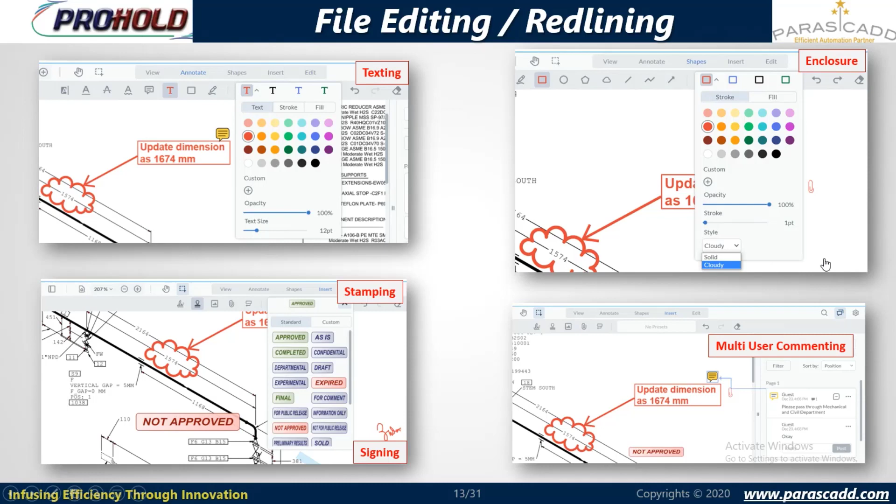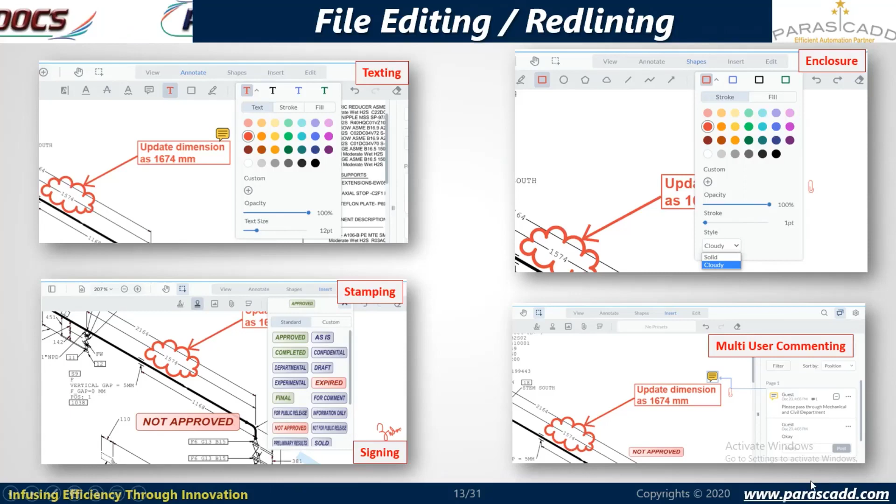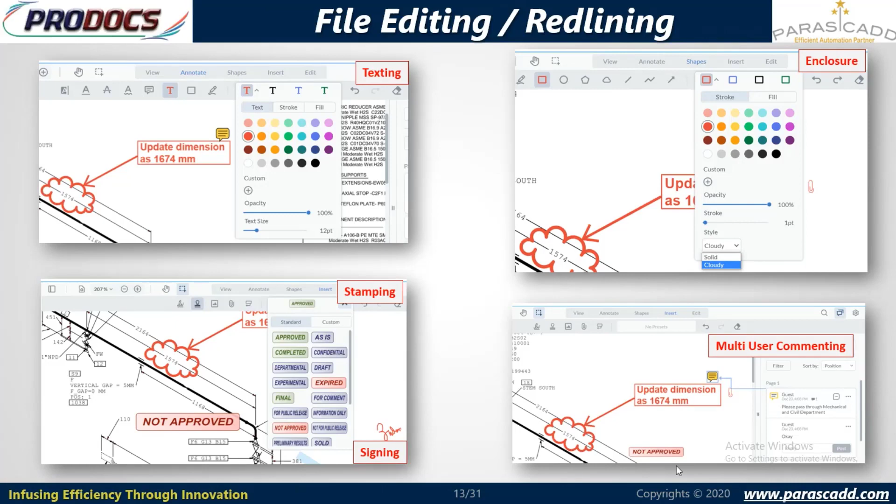You can also create stamps such as approved and not approved for any particular file, and one other feature is available, which is multi-user commenting. With the help of this feature, multiple users can comment on any particular file. Here we can also see how the file editing feature actually works.

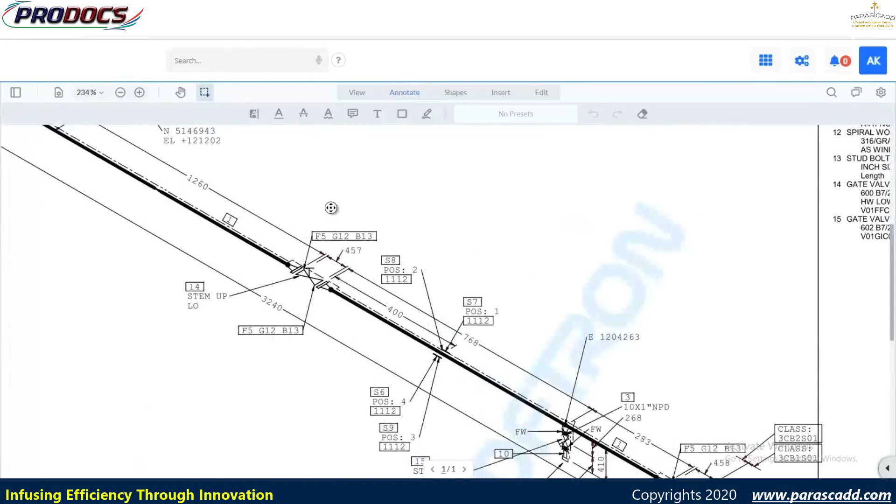Here I'm selecting the folder in the system. Here multiple files are uploaded. Here I select the file and select review. The file is open in 2D format. Here I'm zooming in. Now we want to update this 1260 dimension.

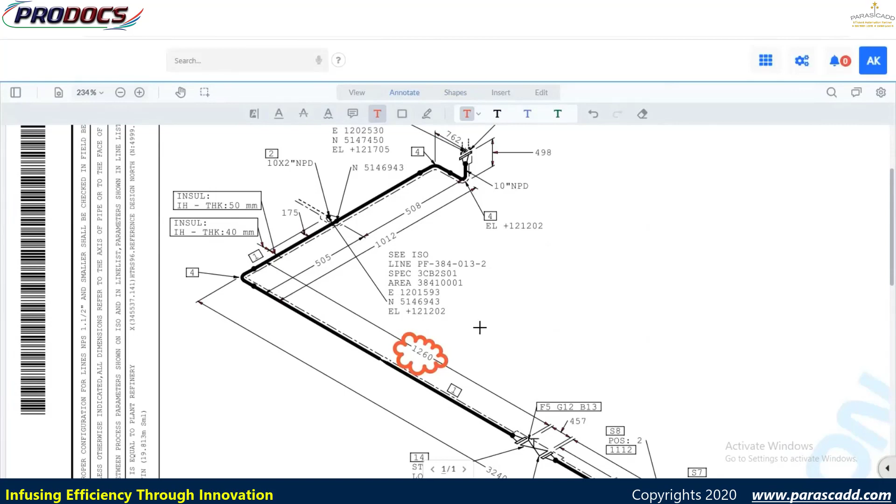So here I'm selecting text and shapes. I've selected a cloudy shape and marked this dimension with the cloud shape. Now I'm editing it and I'm typing here: update the dimension to 1360 mm, and you can also give the color and text size.

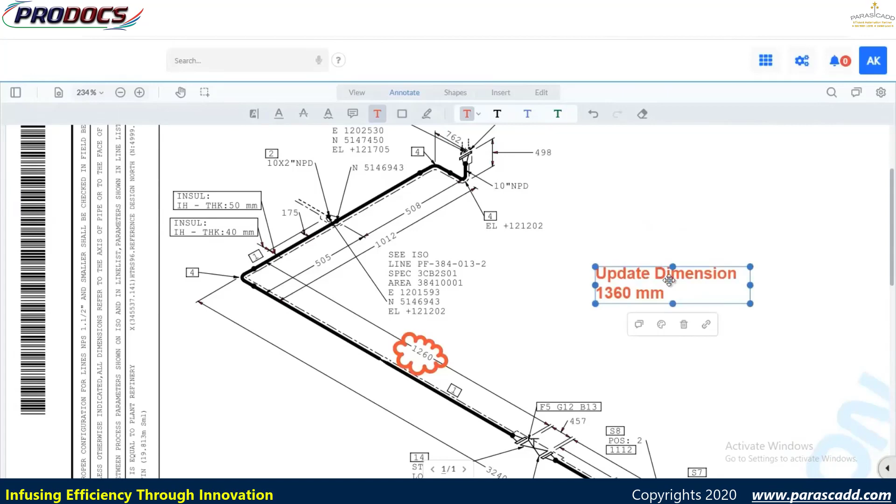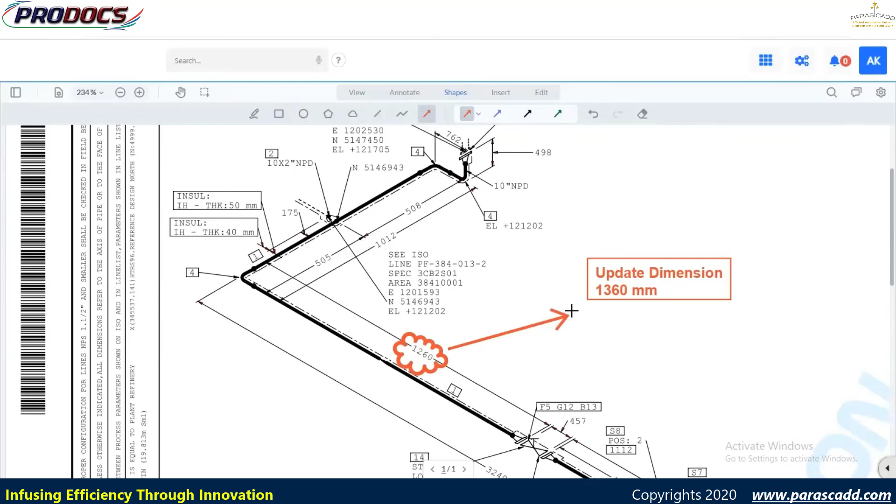You can update the text size and the color codes also. Now I'm giving the shape to these comments. Now it's a cloudy shape, but I want the solid shape, so I'm selecting solid. Now you can enclose with the arrow the dimensions which you want to update. Now it's selected.

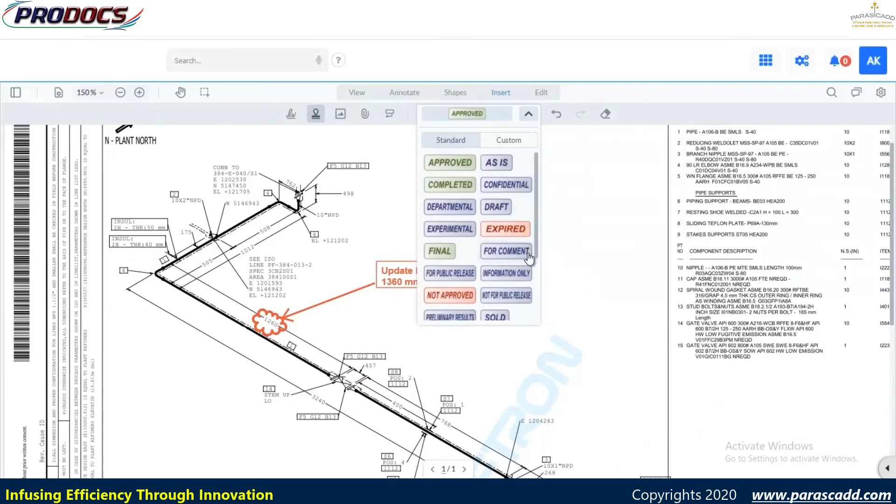Now here you can also insert stamps like approved, completed, confidential, departmental, experimental, expired, for comment, for public release, information only, not approved. Here I am selecting one stamp. I selected the draft stamp. Here I am selecting one attachment.

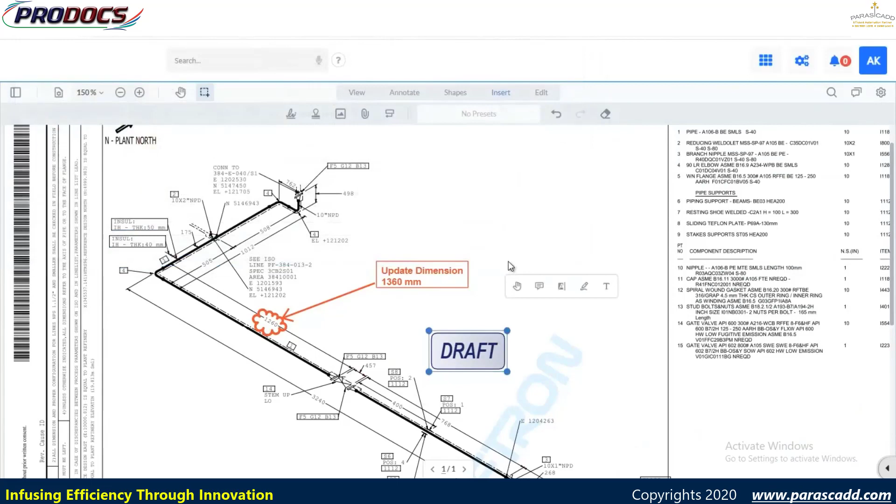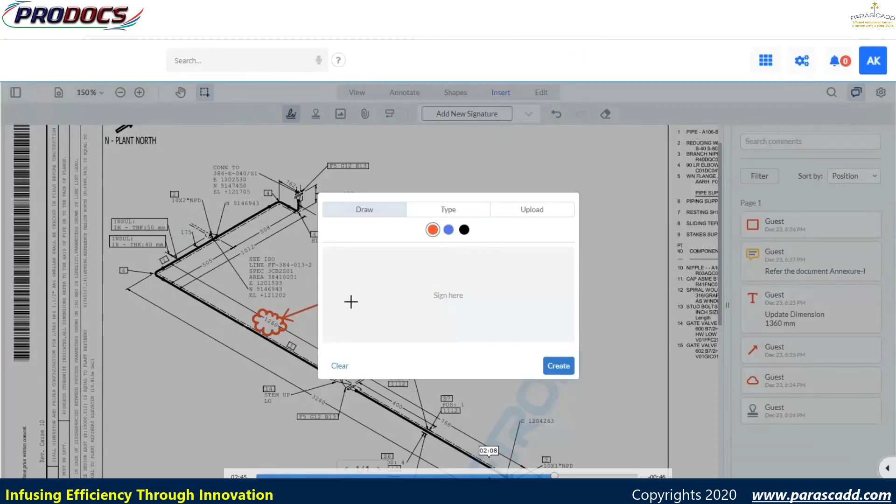And here we also have the multiple user comment feature. I select it, and here the other guest is also commenting, for the document annexure 1, and save. Here you can also add signatures, showing which user has updated these files and who has to approve. Here I am adding the signature.

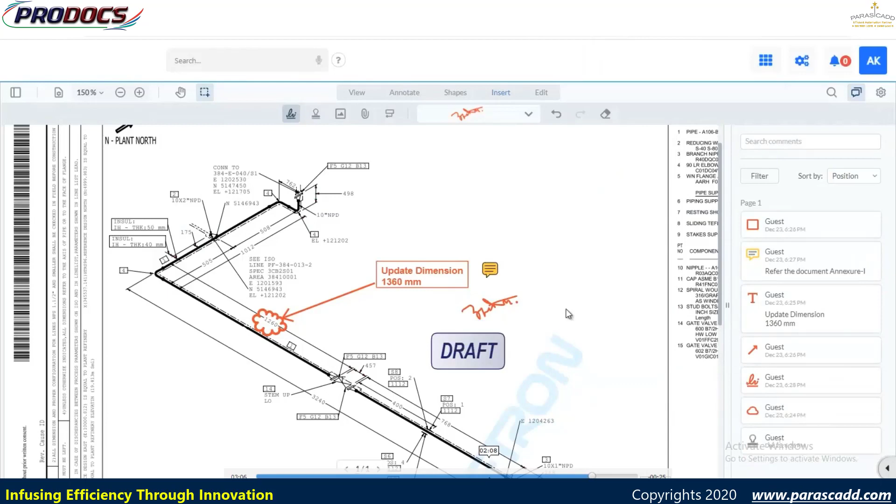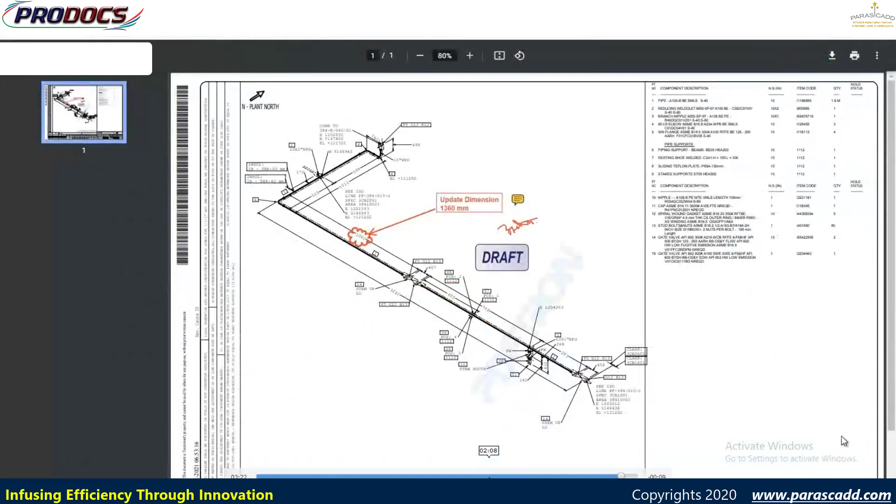You can also give strokes like size, etc. Here I am putting the signature at the position where I have to update it. And now I am selecting the view, and I have to download this updated file. Now we can see the file is downloaded, and we can see the updated data here.

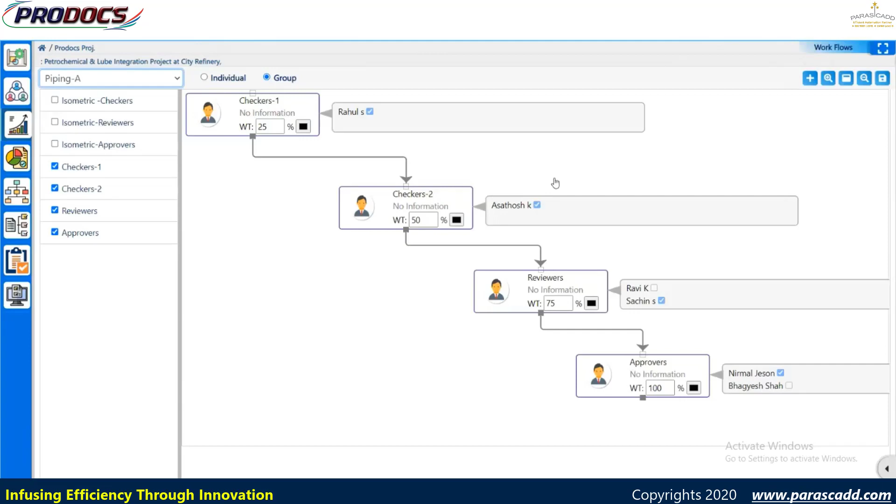Now I'm selecting a folder, the piping CDU folder, and here I'm modifying and allocating the workflow and the employees. I'm selecting the isometric workflow, and selecting the employees Nirmal Jeson, Bhagyesh Shah, Sachin S, Ravi K, and OK. Here we have to assign the group workflow to the piping CDU folder. We can see the pipe isometric checker group is highlighted, which is the active stage.

Now I'm selecting one folder, DHDT. In DHDT, I'm selecting isometrics. You can see multiple files are uploaded. In the isometric checker group, pending files are 10 and completed files are 16. I'm selecting one file and selecting approve. I'm providing the approval date, and also providing the comment, which is checked, and selecting OK.